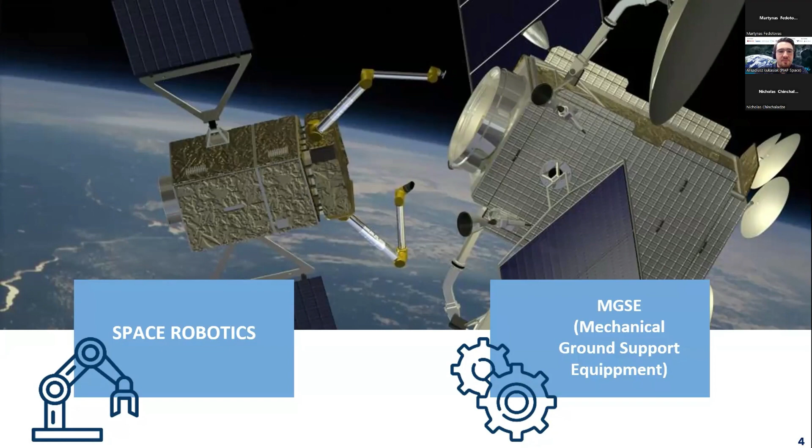Going forward with the robotic systems, as I mentioned, what we are aiming for is to provide solutions or enablers that can serve in a variety of servicing roles in orbit, and that includes most notably robotic arms or manipulators, but also end effectors, including more specifically a LAR gripper, so a gripper designed to grasp the launch adapter ring of a satellite, and also a multi-purpose gripper for general purpose servicing operations.

A LAR gripper might sound like a very specific thing, but actually LARs are widely recognized as a common element that almost all relevant spacecraft have. So they are identified as a common interface basically. And that allows for grasping or attaching ourselves to the client satellite.

And there are also other accessories, most importantly sensors, and especially force-torque sensors, which are very important for space robotics, as they are crucial in compliant robotics, in adaptive operations where the robotic arms and end effectors are interacting with free floating bodies, and also some vision system capabilities, which are also crucial, especially in the very last phases of rendezvous or grasping operations, where the distances between spacecraft are low. So those are the main product areas in the robotics section.

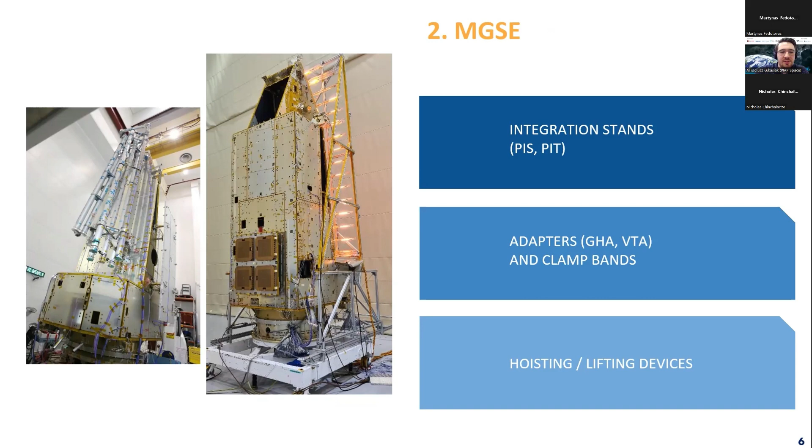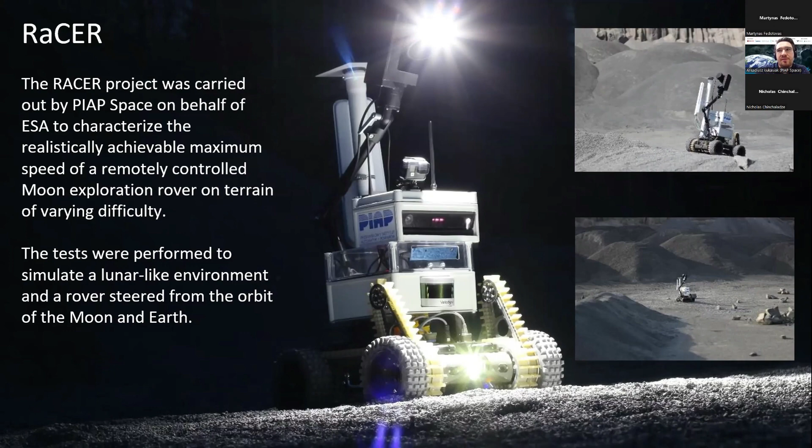And going further with mobile robotics, we were also involved in the European Commission PRO-ACT project, which aimed at demonstrating the cooperation capabilities between multiple robots. And in that project, we were designing the mobile platform with a robotic arm and also some end effectors. So that was an important step in gaining experience with robotic arms on our side.

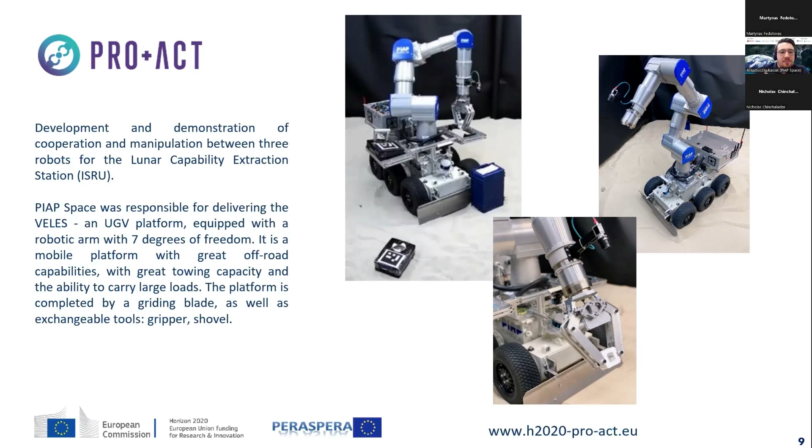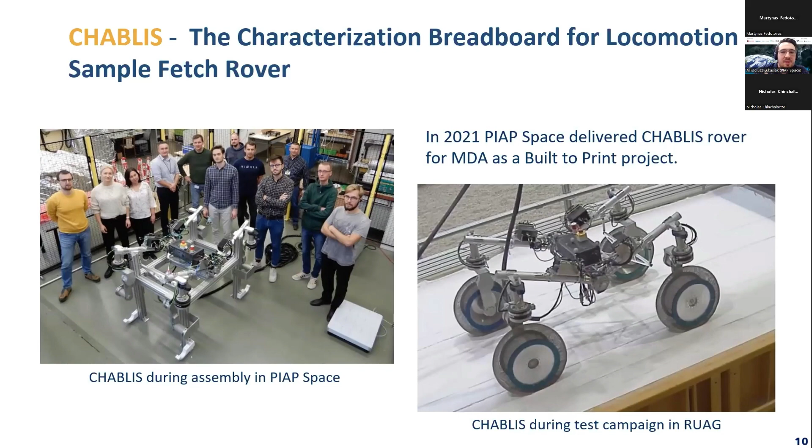Going forward, there are also some build-to-print projects. For example, here the characterization breadboard for locomotion of the Sample Fetch Rover is also a part of our previous experience. We can see this model here during a test campaign on an inclined plane. And last but not least, there is also a part of our previous experience with end effectors and grippers.

And so here in the theme of grasping launch adapter rings, in the middle here we can see the ADREXP grippers, which were our first steps in that area. And those were intended to grasp a particular type of LAR. So it was designed specific to a certain mission, a certain type of satellite.

And now, since then, we are also moving forward in terms of providing a more general solution, and end effectors that are actually quite universal and can grasp a variety of types of LAR, and I will touch more upon this subject later.

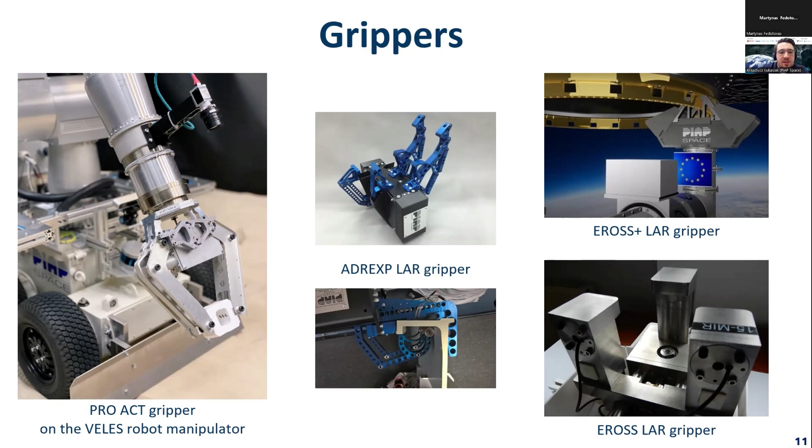So going to the currently developed projects, I will start with Titan. Titan is an ESA project. It's about robotic arm development for on-orbit servicing operations, and PIAP Space is the prime contractor and integrator of the arm, and is leading an industrial consortium composed of Polish companies, including the Center for Space Studies of the Polish Academy of Sciences, which is responsible for control algorithm design and some of the electronics. Also SpaceIF, which is responsible for analysis, most importantly thermal analysis within that project.

So a robotic arm is, of course, a very universal and adaptive feature that can serve in a variety of roles. I will go now into more specific information. Within the Titan project, the goal is to reach TRL6 by the end of this year for the whole arm, and the arm is visualized here on the slide. It is characterized by a range of around 2 meters.

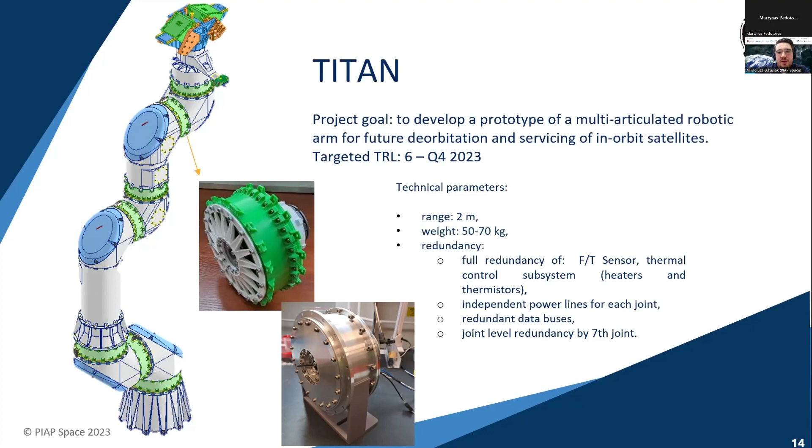Now, as part of the Titan project, there is a reference mission designed, because the whole aim of the project is to develop an arm, so there is no specific mission that would be a source of our requirements. So we have a reference mission that includes some of the common aspects that we could expect in real missions, and one of those real missions we will also discuss a little bit.

We can have missions where, for example, the rigid connection between spacecraft is established that way, or the robotic arm can transfer this connection into a separate clamping mechanism, then free itself and do some servicing operations. Also, we can have scenarios with two robotic arms where one of them is responsible for grasping and the other one is responsible for manipulating objects, and so on.

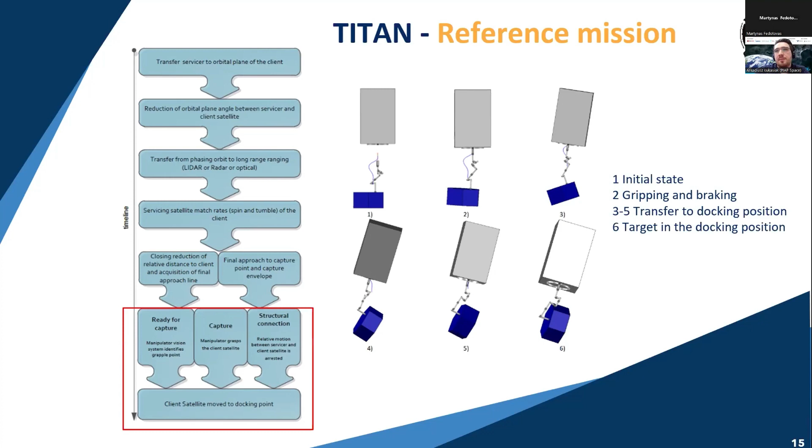Now, going to the specific mission I talked to you about, we have a family of projects called EROSS, with growing complexity and technology readiness level from EROSS to EROSS Plus and EROSS IOD. At this point in time, we are actually at the border between EROSS Plus and EROSS IOD. And EROSS stands for European Robotics Orbital Support Services.

The aim of the project is to demonstrate, in an in-orbit demonstration mission, the ability to grasp a client satellite, to establish a connection, and to perform servicing in the form of exchanging an orbital replaceable unit. That represents a capability to install some kind of additional module into the client satellite, which could be used not only for servicing, but also as a life extension option. For example, we could attach a module that would provide an additional boost and increase in orbit and so on.

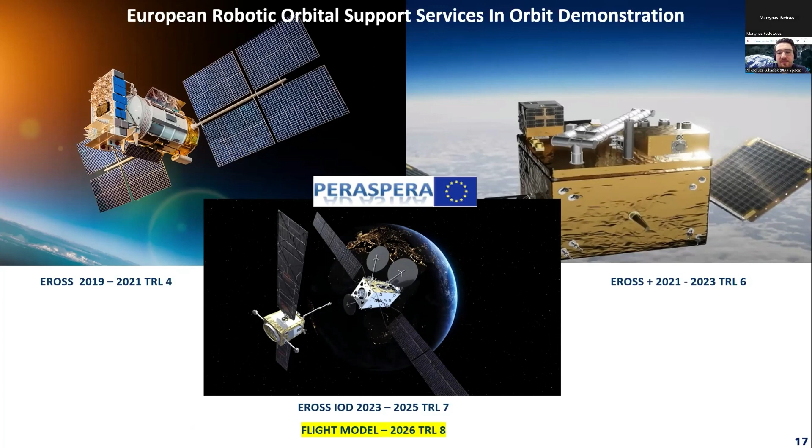Throughout the projects in EROSS, we reached TRL4. In EROSS Plus, we just ended with the demonstrations in laboratory conditions, and we are estimating TRL6 at this point in time. Until 2025, EROSS IOD will be the next phase, which will hopefully be followed by the actual mission with launch in the second half of 2026.

Within that program, we are responsible for providing a gripper to grasp launch adapter rings, and also some dedicated interfaces, which I will show you in a minute. The gripper itself is, as I mentioned, characterized by the fact that it is capable of grasping multiple types of launch adapter rings. It's not limited to one type only, as was the case in the previous designs. It is characterized by a very low mass for its capabilities, of almost exactly 5 kilograms. And it has a large grasping envelope.

So the grasping envelope is the area, or rather a volume of space, in which the gripper has the ability to compensate, to adapt itself to the movement of the LAR, because real life is messy and we have limited accuracies in all of the elements of the system. So there will always be some relative movement between two spacecraft during these critical last phases of operation during capture. So we are quite adaptive in that area.

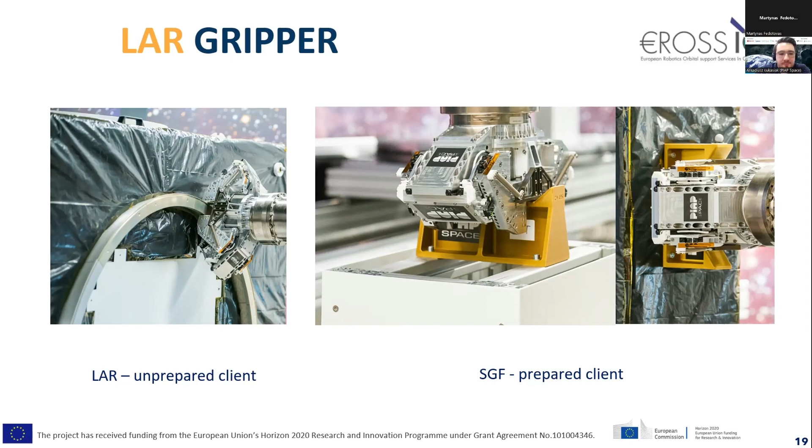So going further, there is also an internal Polish project that is funded by the National Center for Research and Development. It's called Orbita, and its aim is to develop building blocks for space robotic subsystems, and that includes a multi-purpose gripper, which is a modular design, with its lower element being a full rotational module, which enables 360-degree unlimited rotation. That is not a feature that robotic arms usually have, and it could be important, for example, in screwing applications, in attaching panels, connectors, harnesses, and so on.

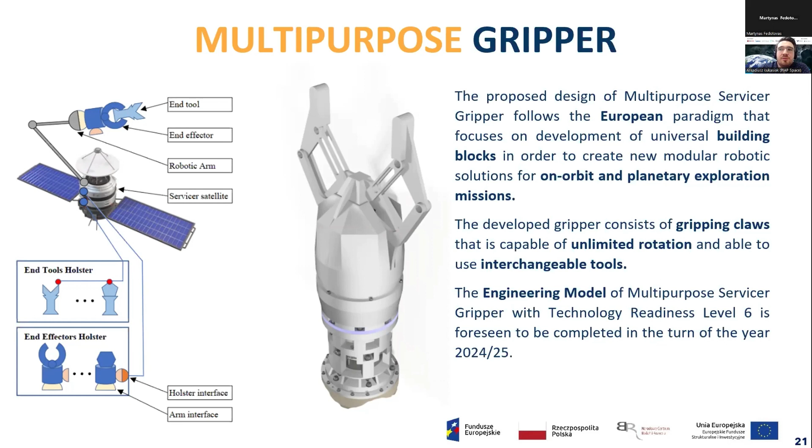And also an effector attached on top of that, which has the ability to grasp different tools and can also detect what type of tool it is holding at the moment. That could be used for a variety of functions, including, as I mentioned, exchange of exchangeable units, attaching connectors, grasping general shape objects, pushing solar panels that didn't open, and a multitude of other use cases.

Now, another building block important in this area is the force torque sensor. So 6-axis force and torque sensors, which is a mechanical structure with strain gauges, but it also has embedded electronics. It is a module, a device in itself, with a mass of around 1 kilogram, that can be attached, most importantly, at the end of the robotic arm, between the arm and its end effector, and it provides essential force and torque feedback to the control system of the robotic arm. This is a sensor we are developing in PIAP Space in cooperation with Germany's ME-Meßsysteme, a manufacturer of industrial sensors.

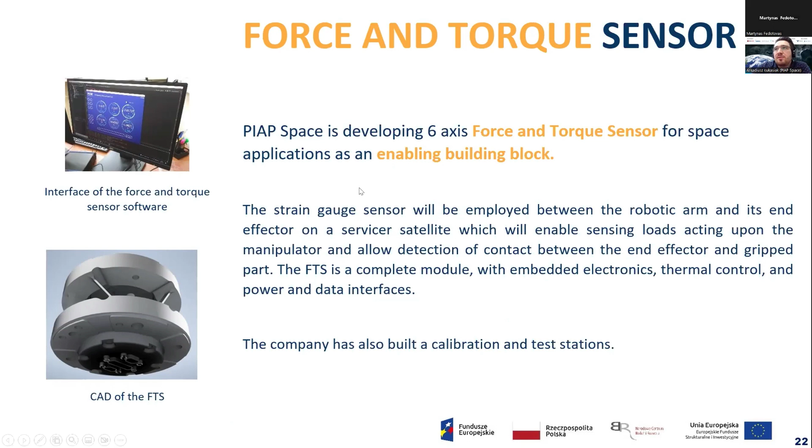Last but not least, we are also developing our vision system, which is designed to help with the unprepared scenario. It is capable of detecting the shape of the LAR and guiding the other systems in this last phase. It is not used in the EROSS Plus project, but it is our own development for the future.

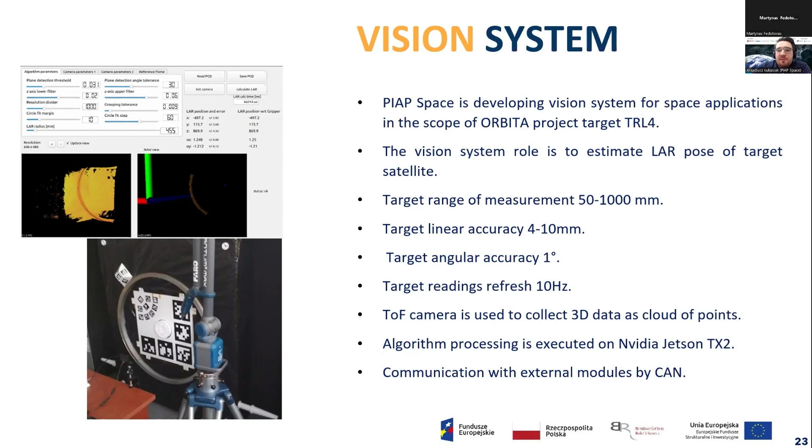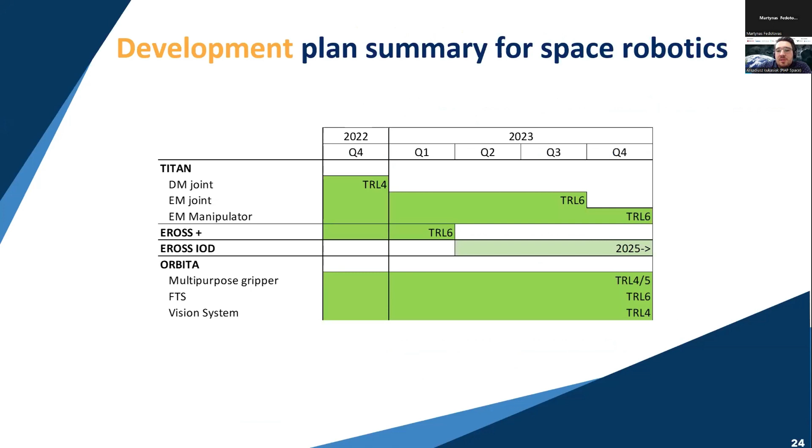And with that, here we have the current technology readiness of each of those subsystems for the nearest future, for this year. And EROSS IOD, as I mentioned, has a planned launch date in 2026. So hopefully, we will see those systems in action.